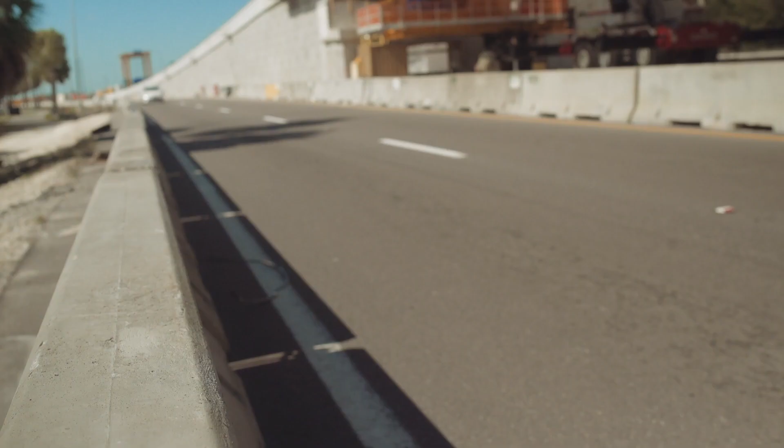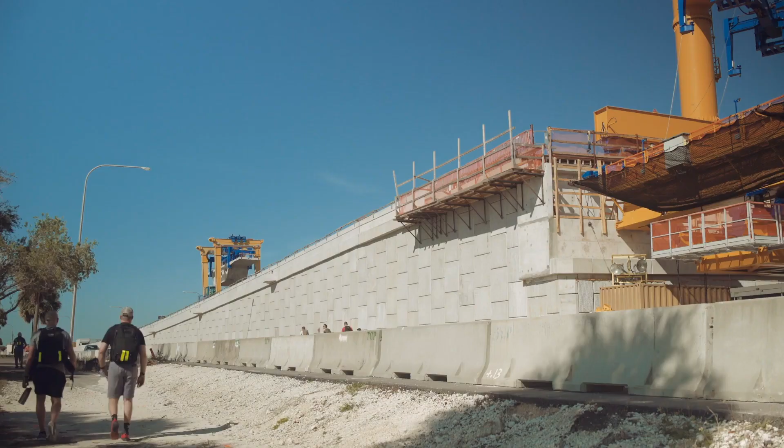It's an exciting day today. We've been working on this for a little over a year now. It's been in the planning for nearly 20 years. We've gone through the design reviews, shop drawing process, and quite a bit to get to this stage. I think it'll get people to where they need to be a lot faster and more efficiently, so it's really good for our area. What you see behind me is the first segment going on the piers for the Selmon Extension, and it's a really exciting day because today marks real progress for the project.

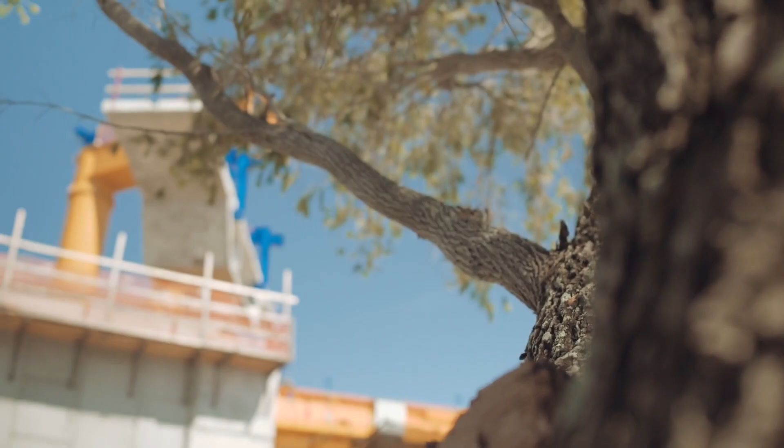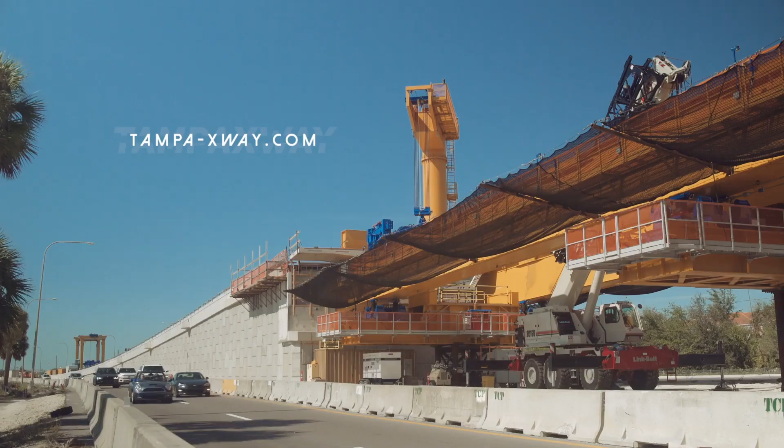First segment's gone in. We're glad to see that. That's going to show the locals the progress we're starting to make. It's going to make a big improvement when we get this project done because it's going to open up the traffic for folks and make the travel from east to west a lot easier.

So it doesn't look like the videos are feeding exactly as planned. Let's just move on through and we'll see if some of the others show a little better.

Again, my name is Russel Dingman. I was the project manager here on the job for basically the second half of it. The Selmon West Extension is located in South Tampa on the peninsula, connecting the southern tip of the existing Selmon Expressway over to the Gandy Bridge that takes Tampa over to St. Pete. The big thing is now it connects the Tampa Expressway all the way from Brandon, through Tampa, and into St. Pete over the bridge without having to go through a red light or any residential neighborhoods. So that was the big benefit of the job.

It's a $230 million design build with an original project duration of 1,000 days. The owner on this project was Tampa Hillsborough Expressway Authority. DOT did have involvement as well, since we had level 2 bridge work going on down the DOT right of way. The engineer of record was AECOM. The design build team was Kiewit Infrastructure South, paired with our internal group, Kiewit Engineering Group, who helped with conceptual work, looking at constructability and methods for how the project was going to be overall built and the sequence of the work.

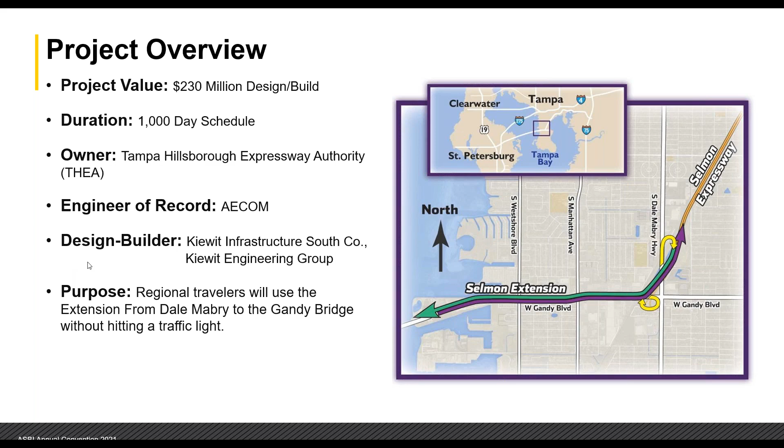So this project has a lot of history, not all of it good. The Florida Department of Transportation recognized that they had a lot of frustrated travelers on Gandy Boulevard after they came over from Pinellas County into Hillsborough County across the Gandy Bridge. They went through a very congested area with a lot of shops on both sides of the road with a lot of signals that slowed down traffic.

So they developed a PD&E study in 2002 that basically developed two alternatives. One was to widen Gandy Boulevard, the other was to bypass it. Of course, the bypass would have solved the problem of folks hitting traffic signals and the long delay along that route. But there was a lot of criticism. The businesses were really concerned that nobody would be able to stop easily in their shops. And so the project was canceled due to that public criticism.

Well, the Tampa-Hillsborough Expressway Authority was still very concerned about folks leaving our facility after going pretty smoothly from Brandon, wanting to get onto the Gandy Bridge. And so THEA developed its own PD&E study using a very unique design that utilized DOT right-of-way, first of its use in Florida, with an elevated structure along the median. That PD&E study was developed in 2010, and then we procured the funding, bonding for most of it, and moved forward with the RFP with a notice to proceed of the job in 2017.

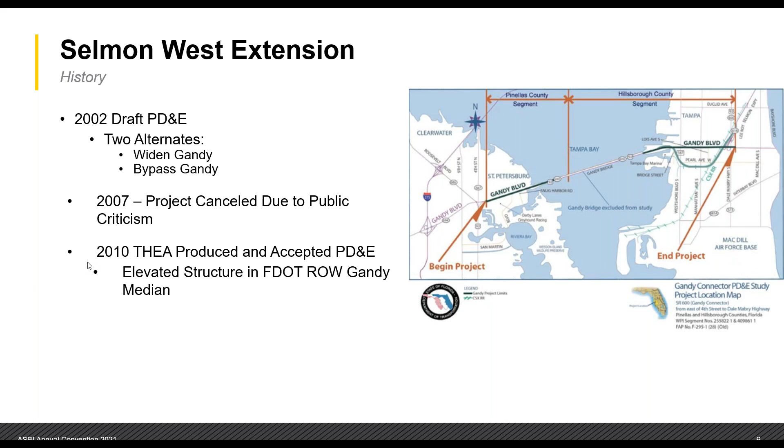So here's the bypass concept, and this was to the south of the Gandy Bridge, Gandy Boulevard, along a CSX route. It would have been elevated. It would have taken up quite a bit of private property along the railroad tracks, and the local folks are very resistant to this concept in that it would remove all of the traffic away from their businesses.

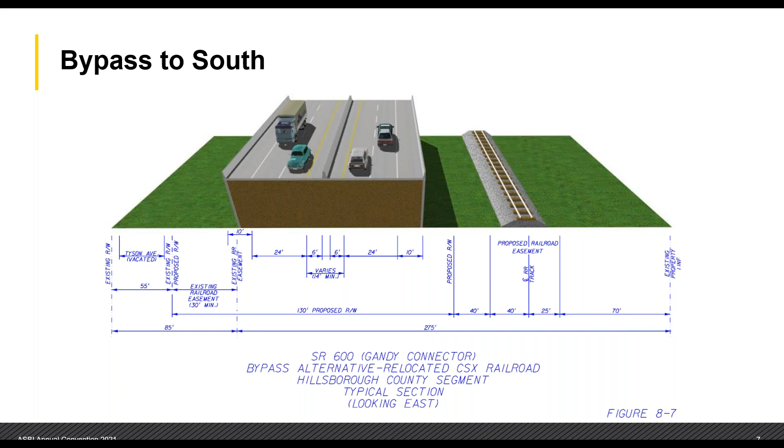The next option that they looked at was an elevated structure that was just north of the existing Gandy Boulevard. In this case, it would have removed all of the shops on the northern portion of the boulevard, and all of those shops, of course, were in major uproar over this idea.

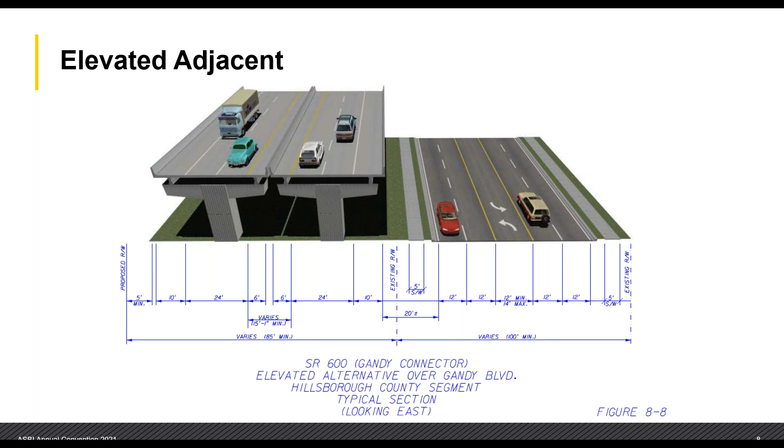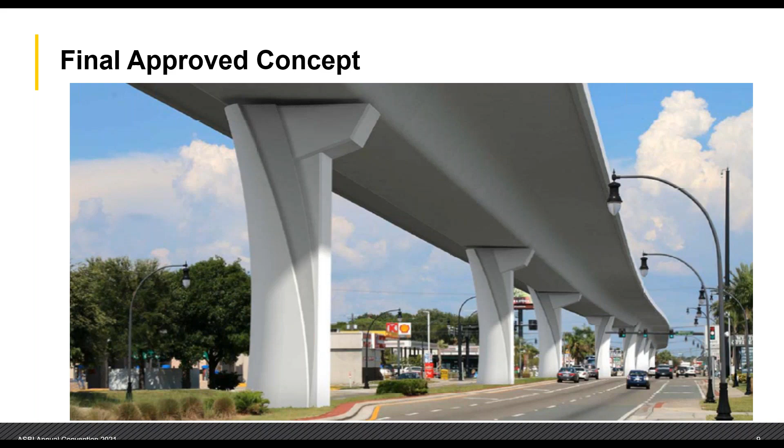So the final concept that was in the 2010 PD&E study that THEA developed has pretty high clearance, so you can see shops from one side to the other. Additionally, it ensured that none of the existing intersections had to be revised as part of the project.

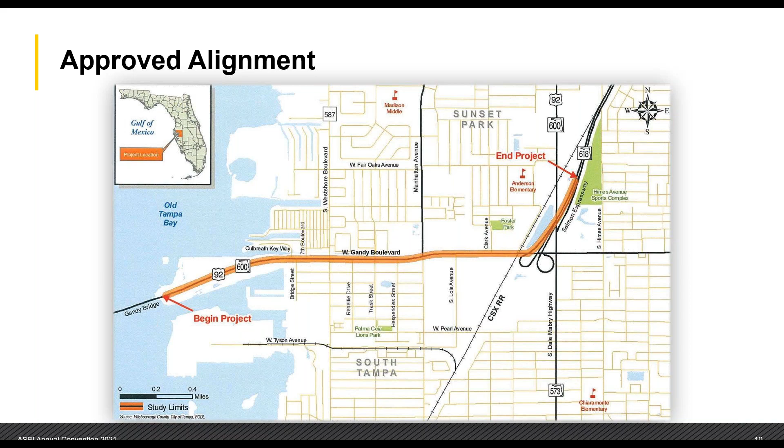So as Russell pointed out, the approved alignment went along the Gandy Boulevard right-of-way. Again, it's DOT right-of-way, and therefore DOT had involvement in that. They had to make sure that whatever was going to go over their right-of-way was a safe structure. So the project begins at the end of Gandy Boulevard and ends over near Dale Mabry.

So the main viaduct was 8,000 feet long. It required independent peer review. Because of the aesthetics that we wanted, we asked that all of the folks that participated in the RFP develop an aesthetic concept that made it look pretty similar throughout, no matter what type of structure they used. In this particular case, they used a single box structure. At least that was what was in the RFP.

With top-down construction, in other words, no lane or median closures during the day. All that work had to be done at night. Very limited space for the piers and foundations, and therefore the contractor had to do some offsets, and it did require redundant drill shafts. There were some requests that we'd allow non-redundant drill shafts with significant savings, and we refused that option.

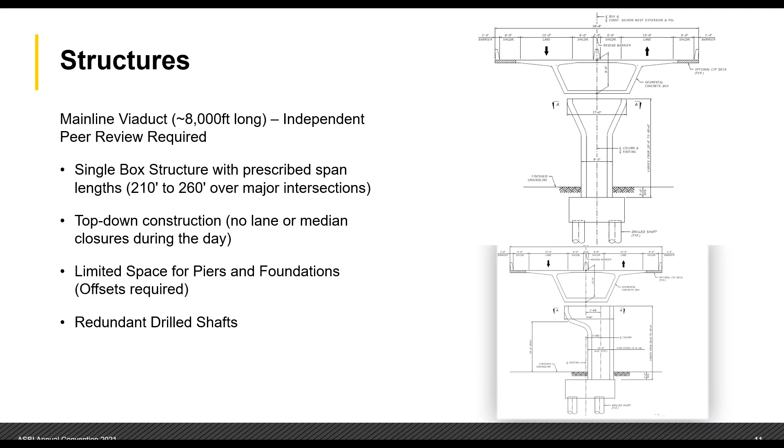We also required fairly low height landscaping, so again, the drivers can see through and over the landscaping. This project required state-of-the-art aesthetic lighting, which we can control from anywhere through a smartphone app. So we can change colors through that app. We have any of the colors in the International Color Scheme available to us. Again, I pointed out that this fits within the existing DOT right-of-way, so zero right-of-way had to be purchased for this project.

As part of the erection plan, we required minimal delays and no impacts to the traveling public. And importantly, a couple of the intersections required spans of 210 to 260 feet, which made it problematic as far as design, so you'll be hearing more about that from Bryan.

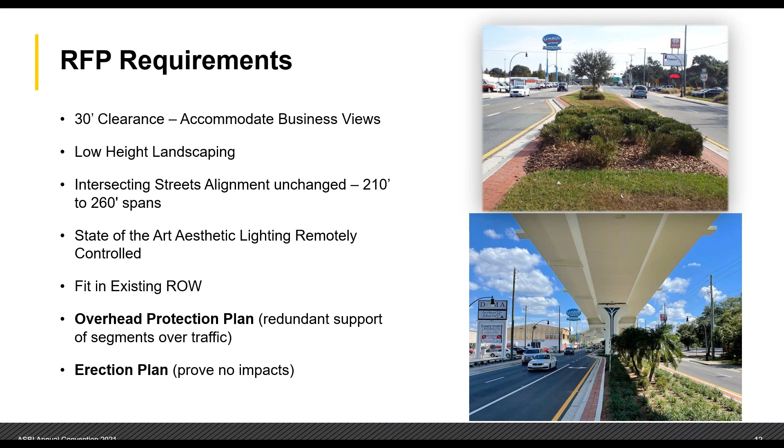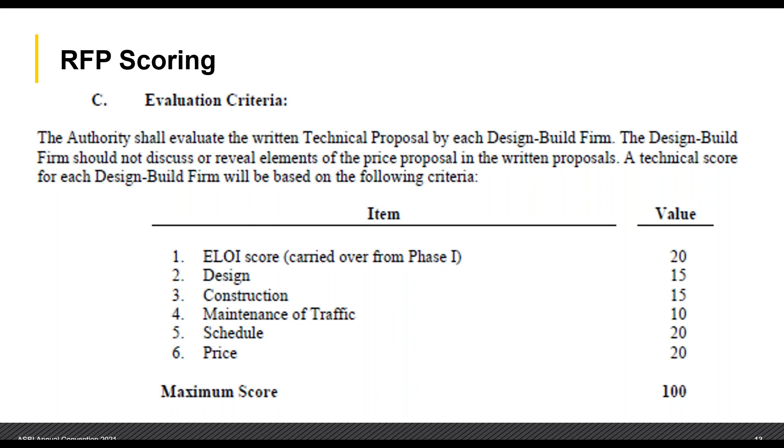So the aesthetic nature and the design of this project was so important to us that we only made price 20% of the score. Everything else - the design had a very high score, the construction methodology, the MOT, schedule was very important. 1,000 days for a $230 million project is really tight. They really have to focus on how they're going to get from A to Z in an efficient manner.

So I'll turn it back over to Bryan, or Russell, I guess.

I just briefly want to talk about some of the restrictions Bryan mentioned. The real idea here was we didn't want South Tampa to basically feel any impact of construction during the course of the project.

From a lane closure standpoint, we had very strict restrictions, where lane closures couldn't be set up till 9 p.m. at night, and had to be opened back up by 7 in the morning. That way we took all construction out of peak traffic times.

Now, as for impacting traffic below, we did not do that over the course of the project. We maintained 2 lanes in each direction throughout the whole job so they could maintain their normal traffic program. The only time we closed any lanes was during those nighttime closures.

We did have some full closures over nighttime periods for the far east end, where we had to set the big steel tub box girders. But we had a very limited number of those that we were allowed to utilize through the course of the project.

Another big restriction was with our substructure. Since we had the offsets, as Bryan mentioned, we had to maintain the location of the existing median and all the existing turn lanes. So we had some offsets, and about 80% of our substructure had post-tensioning, to allow us to pick the location of where the piers went before the final location of the segments and the actual structure was determined.

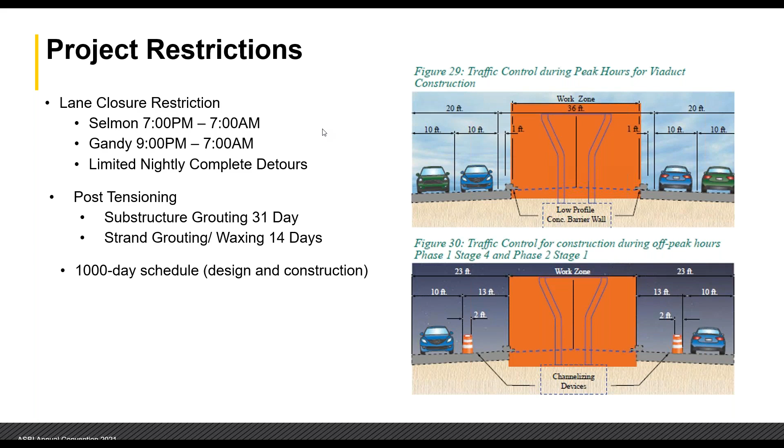Now I'll turn it over to Bryan Lechner, and he'll go through some of the other constructability items and thoughts that we provided going into the design.

Thanks, Russell. Pretty early on, even before the LOI and the RFP came out, we knew there were some pretty key challenges on this job that were unique. The first one here was our 1,000-day schedule - that's design and construction, and really it's a 1,000-night schedule.

If you look at the requirements of the RFP, there's not much you can do during the day with a conventional overhead gantry type balanced cantilever erection. Really, to get it done in time, we would have to have 2 headings using an overhead gantry and a more conventional balanced cantilever erection scheme.

Also, the span lengths are a bit awkward - too long for span by span, and a little too short for efficient or economical balanced cantilever. But those span lengths were set based on sight distance for the left turn movements across the intersections. So all our major crossings had spans between 210 and 260 feet, and our end spans were on the order of 170 to 190 feet.

We also had these large eccentric foundations because of those left turn movements, and getting those foundations to fit in the median and support the loading required for these long spans was pretty challenging.

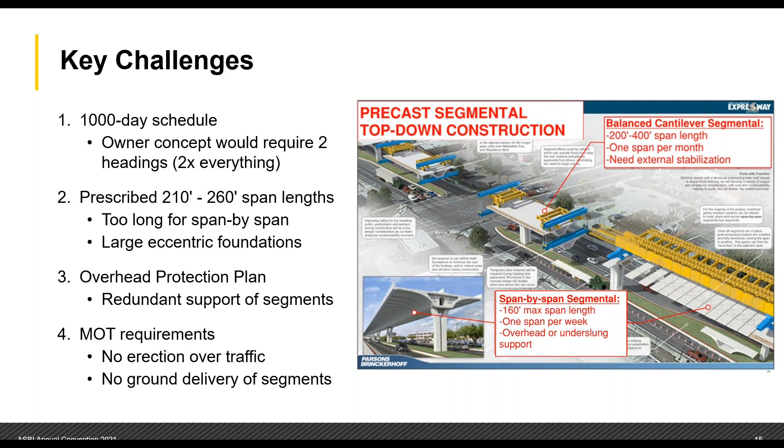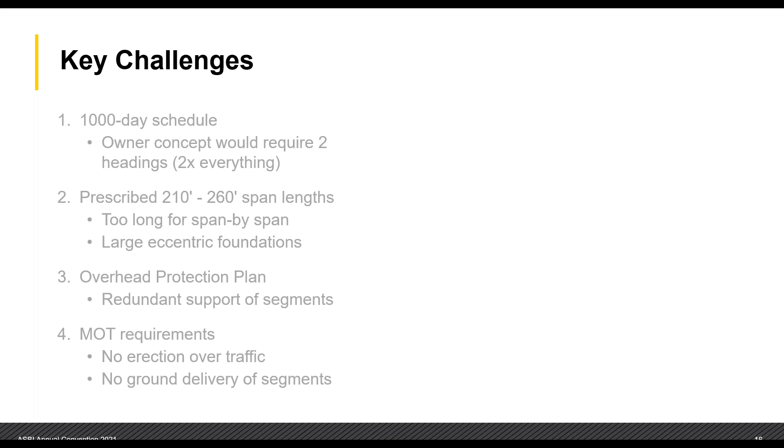And lastly, as Russell mentioned, the MOT requirements were pretty onerous, and what it came down to is you really couldn't work during the day if you used a conventional system. So pretty early on, pre-LOI, pre-shortlist, we determined a key: we wouldn't even pursue the job unless we could figure out a way to build this in span by span. We just didn't think it'd be economical to have two overhead gantries and two headings going at the same time.

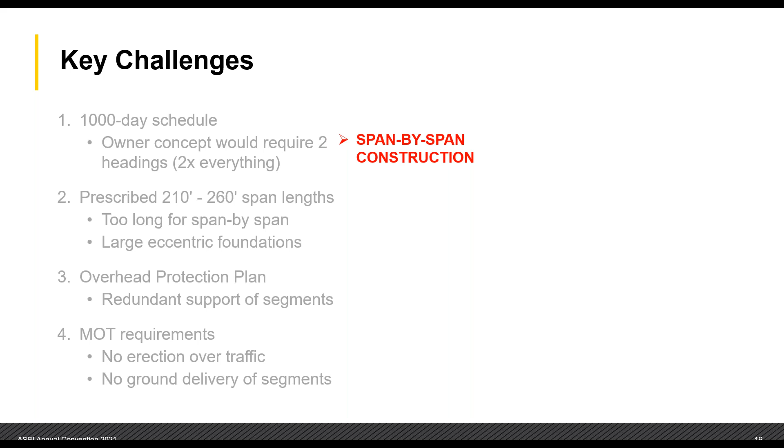We also decided pretty early on that an extradosed design to reduce the mass, making these longer spans possible, was going to be our best approach.

For the overhead protection plan and erection plan parts of the RFP, we also decided an underslung girder made more sense here, because each segment, after being set on the girders, is supported positively by the erection girders, which are redundantly supported by temporary towers—there's more than two towers, there's three or four towers under each pair of erection girders.

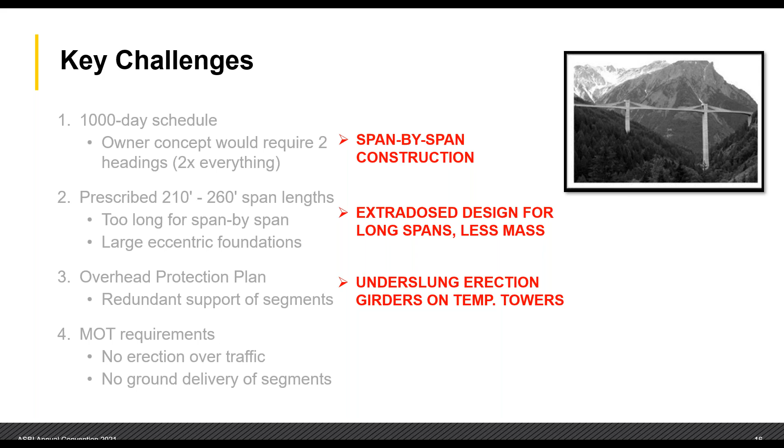This way we achieve redundant support of the segments before we stress all the post-tensioning. That 30-foot height really helped, because you don't have to worry about the cross beams of the erection girders getting in the way for overhead clearance on Gandy Boulevard. And lastly, it's pretty obvious, but top-down construction with delivery of segments from the completed structure made a whole lot of sense here as well.

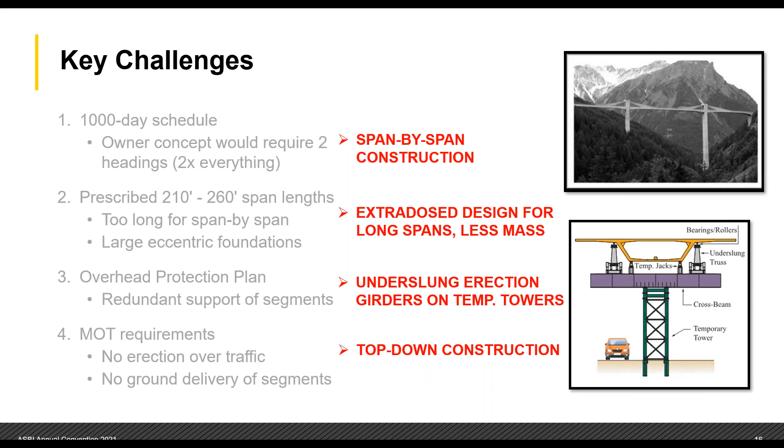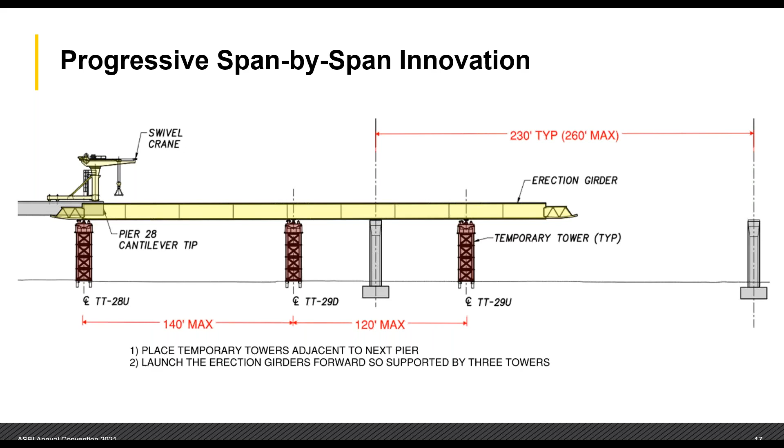So what we came up with is this progressive span-by-span innovation—it's essentially span by span in two pieces. We're doing a longer span in two different pieces, and our temporary towers are split on the piers, spaced at about 120 feet, varying a bit based on each pier location. This way the erection girders didn't know that the span being erected was 260 feet—each section being erected was more typical, 140 to 120 feet, which is pretty optimal for span by span.

Next we erect the pier section, which is 14 segments over the pier, and stress post-tensioning in that section. Those temporary towers actually have a dual role, supporting the erection girders and supporting the pier section temporarily.

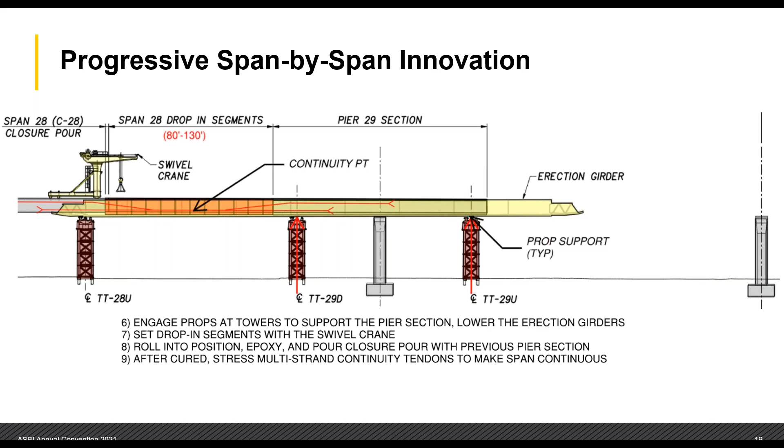Then, without needing to advance the erection girder, we can go back and erect a drop-in section, which is match-cast to the pier section. Then we pour a two-foot closure with the existing bridge that's just been completed and stress our PT in the span to make it fully continuous.

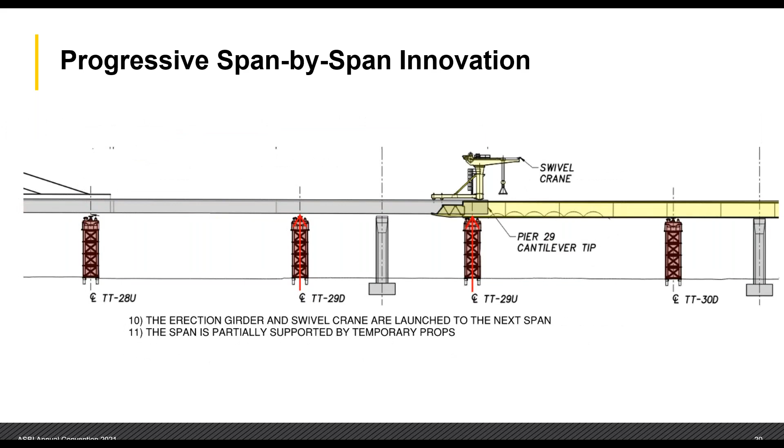At this point the swivel crane and erection girders can advance onward, and behind the erection, taking it off the critical path, we can then form up our fin for the concrete and stress the PT.

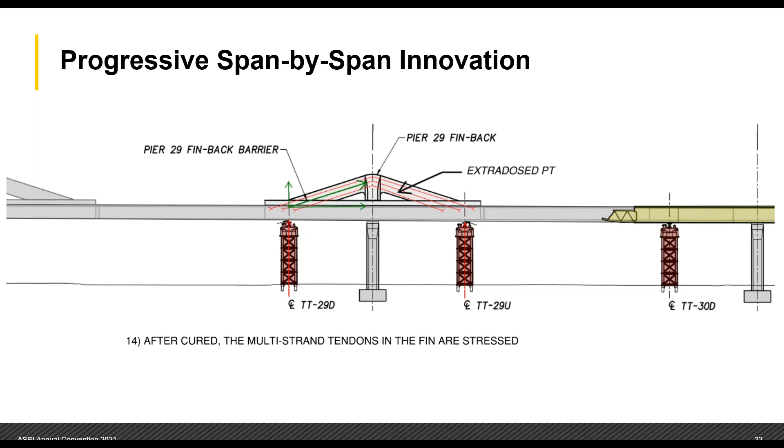The PT and the fin is essentially just taking the reaction out of those temporary towers, so they're actually sized initially to take half of the weight of the span out of web shear and into that fin truss. Then lastly, you can take those towers down and advance them up—we had 10 sets of towers, always kept up ahead of us there. That fin truss replaces the reaction from those temp towers.

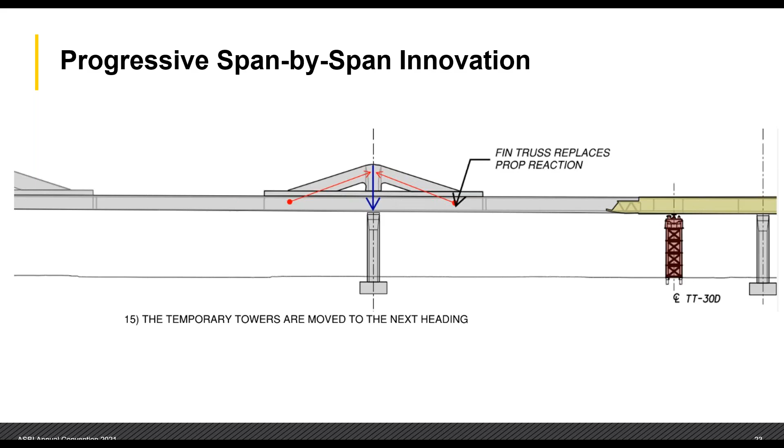Tim's going to take it back here, and there's an animation of the erection of a typical span.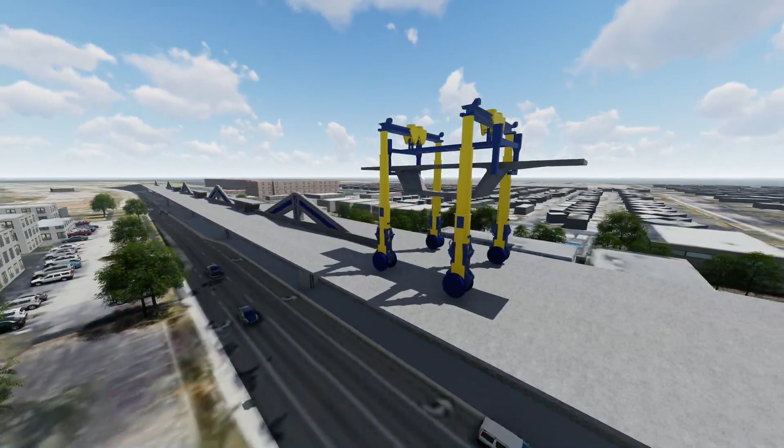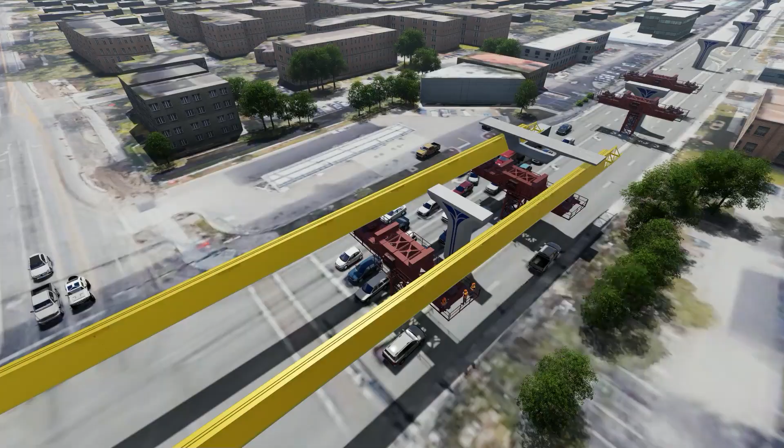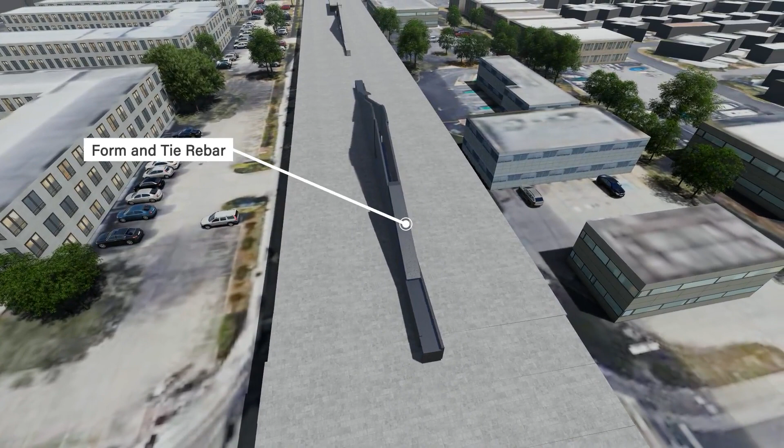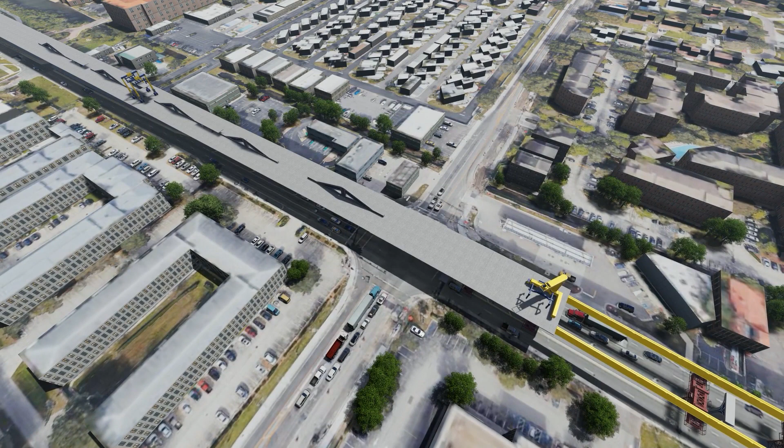Sorry about that, guys—yeah, it's the computer. Yeah, there you go. I'll take the presentation back here in a second. Hey Tim, can you give me the presentation back, please? Were y'all able to see the whole video? It cut out, maybe I have a bad connection. Yeah, I was actually able to see it, Russell. Okay, just checking, it's probably my connection. I think we lost Tim.

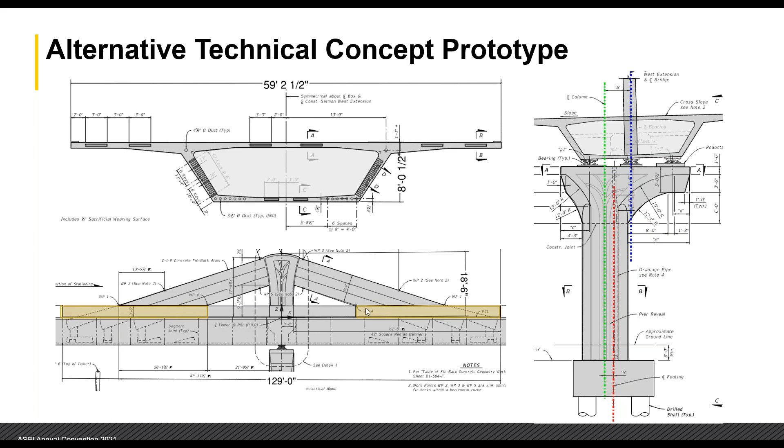So our fin kind of behaves like a concrete tensile element. Our towers are in compression, obviously, and our bridge girder itself is the compression chord of that truss. From about the center of the fin to the left, it looks a lot like a typical span-by-span girder, with external tendons coming down, deviating through a deviator, and some bottom slab tendons as well. Everything to the right behaves more like this king post truss, where the entire triangle rotates like a rigid body instead of getting the more typical curvature and flexure you'd see over the pier for a typical continuous span-by-span bridge.

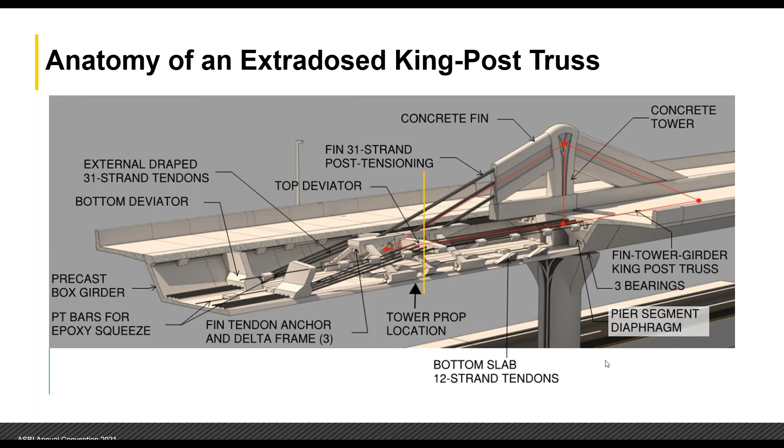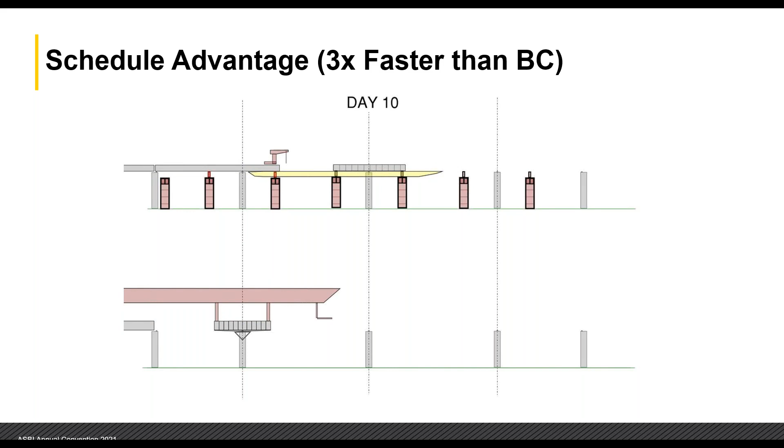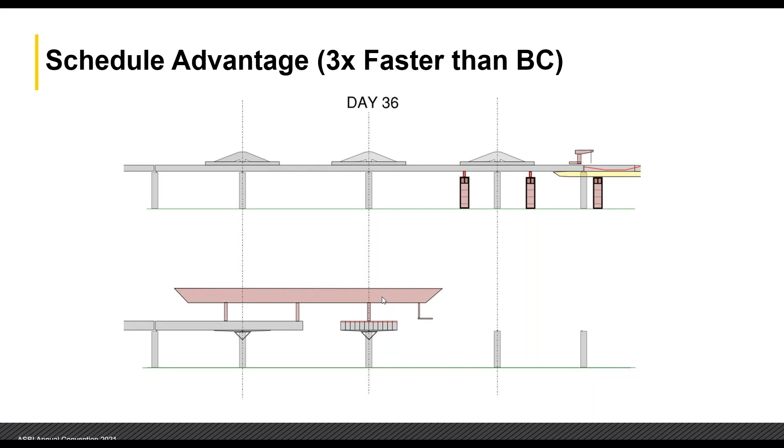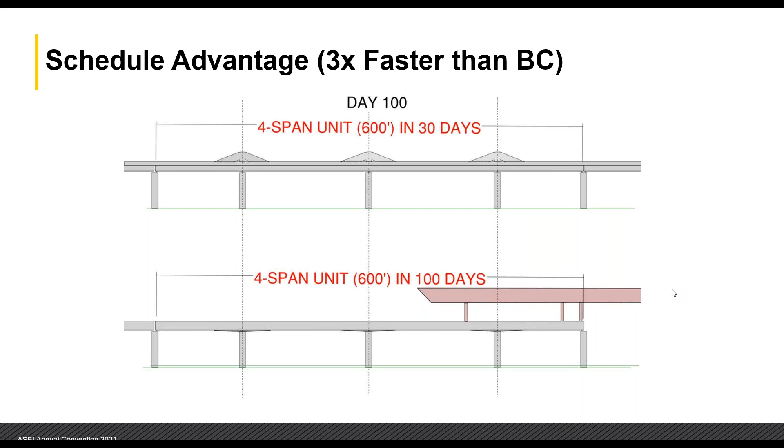The big advantage of this system, I think, is pretty obvious in this animation. We were able to achieve a 7-day cycle at the end of the job per span. Our average cycle per span was 9 days, and really that's nights, because there's not much you can do during the day except deliver segments on the bridge - all the segment erection was done at night. Compared to a typical overhead gantry balanced cantilever approach - this below here is based on our Bayonne job - you can see in 30 days you can erect a 4-span unit versus 100 days for a conventional overhead gantry and balanced cantilever. So it's much faster than the conventional option. The obvious caveat is you need temporary towers away from your piers, which is not always possible.

I think there's also some pretty big advantages here in the equipment. It's much easier to use underslung girders. I'll call them dumb steel - there's not much automation to them. They're always locked, always have more than one support. In our system, there's either 3 or 4 towers under each girder, and it's pretty inherently stable because all the loose segments are on top. 3 points of support, nothing's hanging on cables.

An important thing to remember is that during segment erection, it's pretty much a determinate support for the erection girders. Those 2 temporary towers under the segments are taking most of the load, so you know where the load's going. I think the major problem we have with overhead gantries over the years is that you don't always know where the load is, because you usually have 3 supports and you're moving segments, unloading and loading supports, and that one locked support can sometimes get unloaded and you have issues.

And it's also, like I said, on a 1-to-1 basis - one overhead gantry system versus an underslung truss type system - it's probably half the cost. And on this job, it would have been a quarter of the cost because we would have needed 2 headings. Like I said before, I think there's less risk of instability with this system.

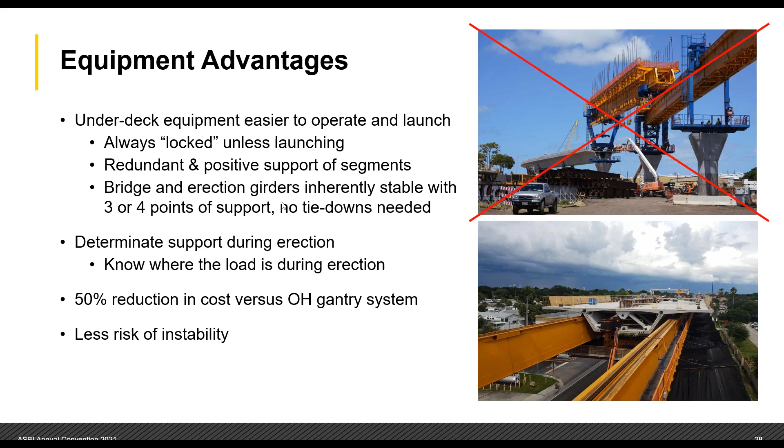There's no God pin on Bayonne. All the guys on site - there's just one pin called the God pin that literally locked the entire gantry from moving longitudinally. There was a guy whose job was to just watch the God pin and make sure it was installed correctly. There's no God pin type issues with an underslung system.

Materially, there's also some pretty big advantages here. I'd say on average there's like a 13% savings in the concrete and in the weight of the bridge, so bearings and substructure, and 16% savings on the PT. That was for an FDOT job with wax tendons. I think the savings is probably going to be more for a grouted job where you have bonded tendons.

Our rebar and transverse PT are similar. The rebar was similar because there's a lot of rebar in the fins themselves that you would not normally have for a balanced cantilever bridge.

On the substructure side, there's actually a pretty big savings, mainly because the permanent foundations are not supporting the overhead gantry. You don't have all that load at the offset being supported by our permanent foundations. There's no segment drop case, no overturning. So I think a lot of our savings came from the fact that all of our temporary systems were supported by temporary towers in the median.

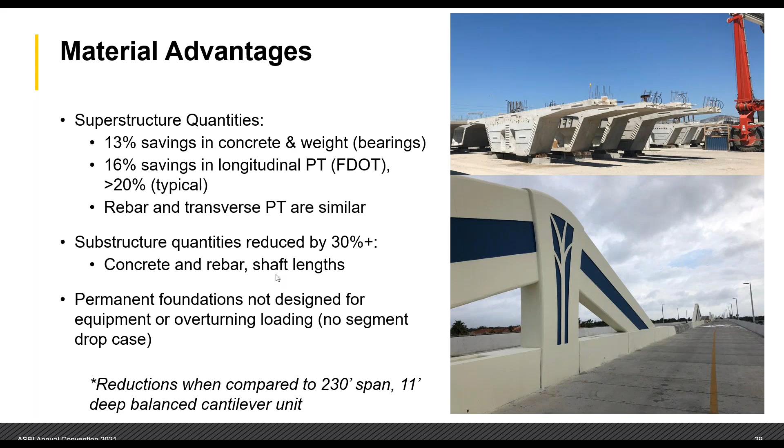And all these reductions are compared to like a typical balanced cantilever 230-foot span type approach.

Then I want to get into some key design decisions. I know at the ASBI conference, someone asked why not just use cable stays like a typical extradosed bridge? Why the concrete truss? Our main reason for that is just the stiffness that we need to actually suck enough of the superimposed loading out of the girder.

You can see on the right there, our goal for just dead load plus PT was half of the web shear is taken out and it's going up into that truss. Then during service and ultimate, that goes down a bit, just based on the relative stiffness between the fin and the webs of the girder. And then at ultimate, that fin cracks, so that's why there's a reduction even more at ultimate.

We did a lot of work on this front to just see where the load is actually going. Also a big benefit is that all the PT in the median - I mean it's literally a 2'6" wide median - and any vehicular impact to those cables would be a bad day. So we actually designed the barriers to take that vehicular impact. It's a huge benefit, and also a big reason why we went with a concrete truss.

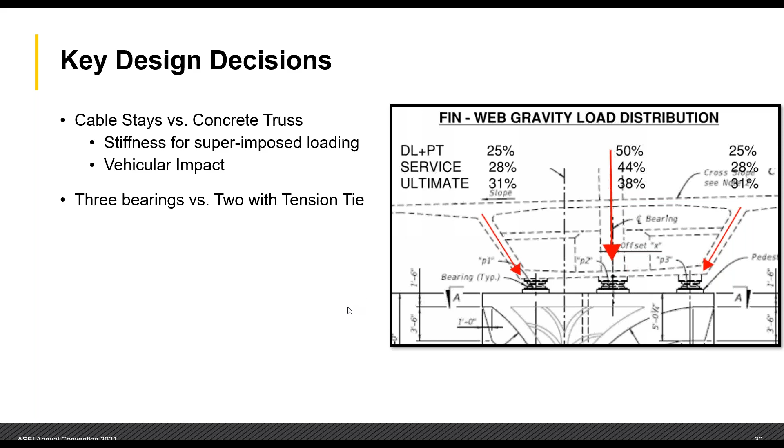And lastly, just some comments on the flexible filler and its impacts on our external and bottom slab tendons. Obviously, if you have a waxed type system, it's an unbonded PT situation, and ultimately that controls the PT design in the positive moment region. It did not in the negative moment region. For a typical balanced cantilever bridge, your top slab tendons are all going to be grouted anyway. Even in FDOT, all the wax tendons are your draped and bottom slab tendons, but it does reduce the amount of stress increase at ultimate that you can count on, and it ends up controlling your PT design and quantities at midspan. We also didn't really have a good feel initially for what stress increases we would actually get because of this rigid body rotation of the pier truss or the fin truss.

So we actually did a push down analysis, similar to a push over analysis for seismic. We did a push down analysis, basically a large displacement model, with the tendons modeled as explicit elements along with the deviators, and we allowed all the hinges to form where they would want to form. We see hinges forming at midspan in our end spans and in our middle span for loading in the middle span, and actually negative moment hinges forming at the ends of the fins. We were able to explicitly measure what the stress increases were in these tendons and use that for design.

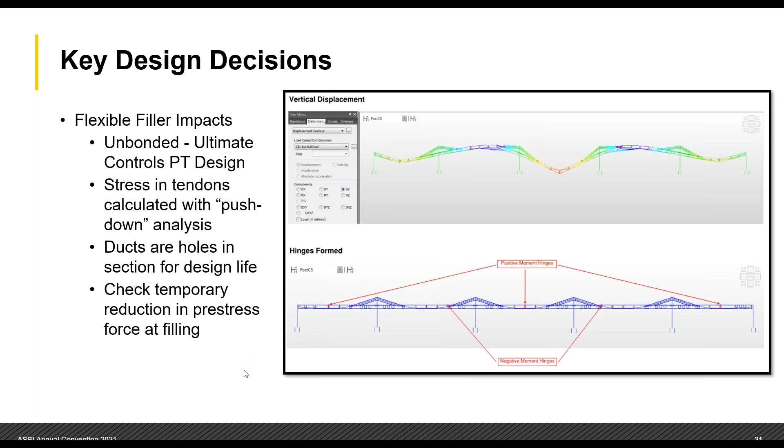I believe that's all I have for now. I think Russell's next.

Okay, I just wanted to go through some pictures explaining some of the stuff on the job, some of the things we did. This being one of the first of its kind for FDOT, going with the wax system and also with the fin back system.

We did several mock-ups out at our casting yard, both to demonstrate the waxing process and also to show the integration with our fins. Here you can see a full-size fin mock-up that we did, fully constructed with rebar and everything, just to make sure we understand any issues or kinks we might encounter in the field before actually building on the permanent structure. Also on the right, that's a waxing mock-up simulating the waxing process through those fins, to make sure we're getting the entire duct fully encapsulated with wax so the tendon is fully protected. Next slide.

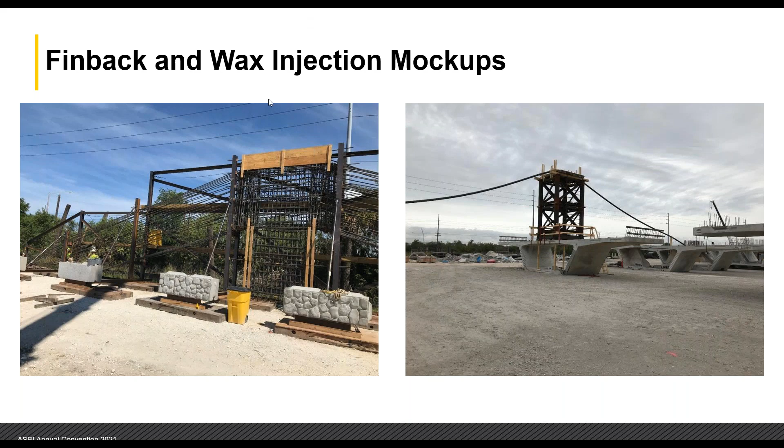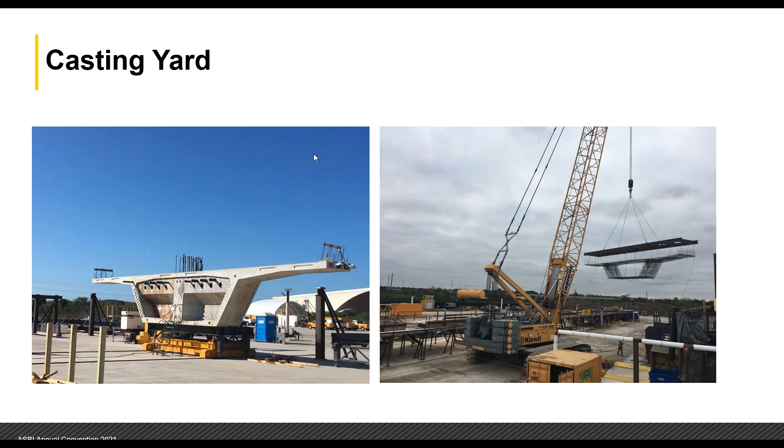So this one and the next slide are just some pictures from our casting yard. We had 744 segments on the job. We set up with a 5-bed system: one that could do the expansion joints and pier segments, 2 that were doing typical segments, and then 2 final ones that did all the anchor segments - the segments that tie into the fin from a timing standpoint.

The anchor beds could also be converted to be used to do typical segments as well, and that's really where we optimized, going from system to system.

We also had the rebar jigs set up back behind there, and I think we had 7 jigs set up so we could pre-tie our cages and set out.

We had about a 10-acre site that we set up on, with the storage capacity of taking right up around 250 segments out on site. Towards the end of the casting operations, we were getting pretty full, but we never did actually fill the site, though we were right there at it. So this 10 acres turned out to be the right size for our 744 segments that we had to cast for the job.

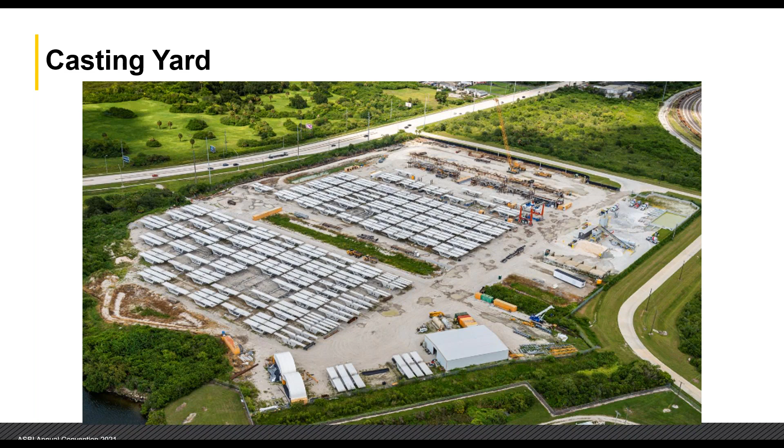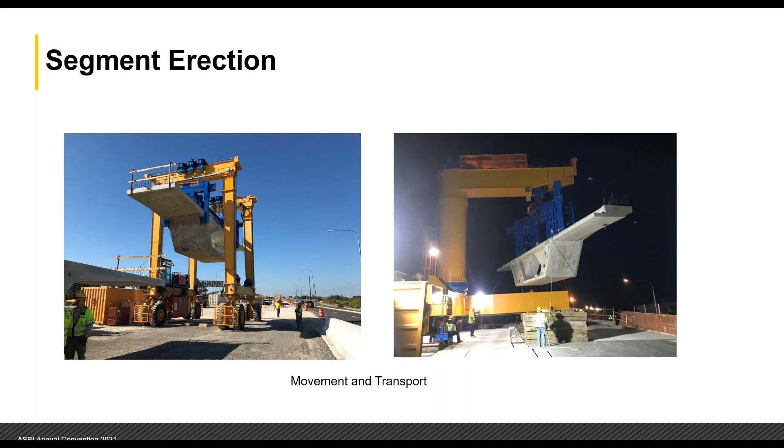This is kind of just an overview - you can see how at night it was all lit up and how the segments looked. As Bryan said, we'd initially set the segments out, rolling them out from out to in. We'd build out that initial pier segment, do the initial stressing on the pier segment to tie it together, and then we would do our drop-in segment and closure pour there at the end of that, prior to launching forward to the next section.

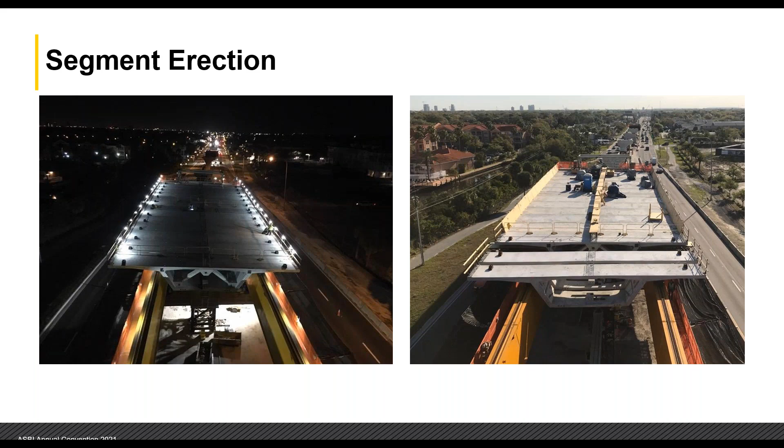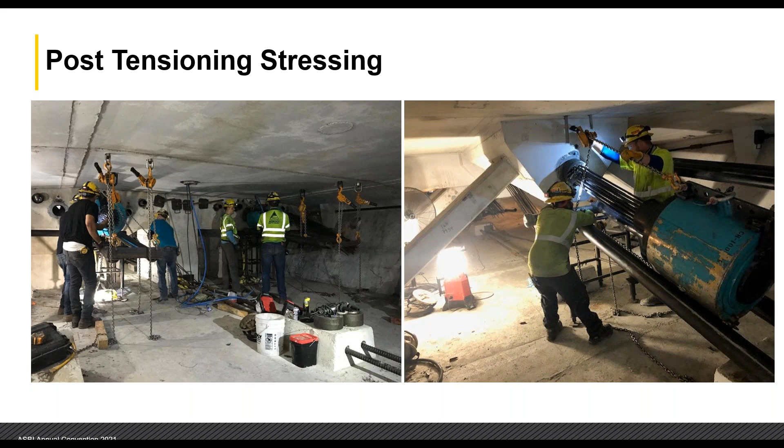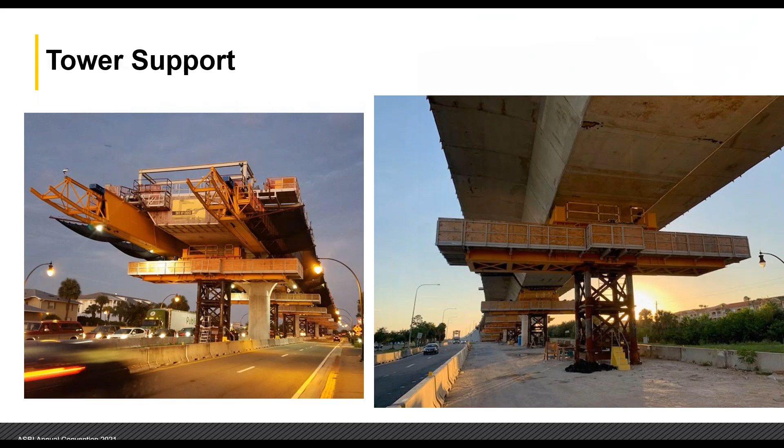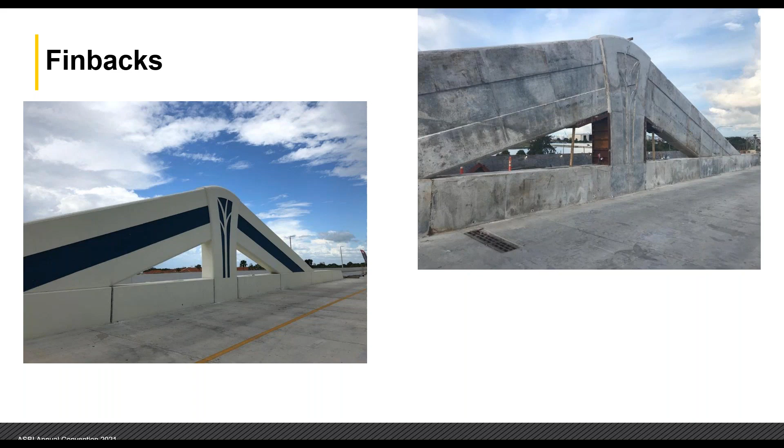This is another final actual picture there on the left of the fin, so you can see the final design, the aesthetic design that we came up with, and on the right there's an in-progress picture to compare the initial stage to what the final product looked like.

Bryan talked about the different lighting systems. All the fin backs up top also had internal lighting inside the fins and also on the outside shooting up the fins, with the ability to change colors and modify for different events in the locale, whether it might be for the local sporting teams or at holidays. Gives them a great time.

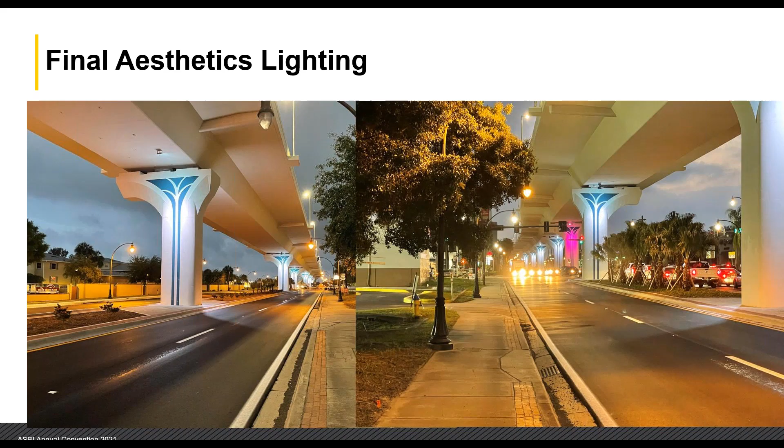Go ahead, Bryan. Okay, so now we have our third video. This was the night that we set the last segment.

Having some struggles with this video.

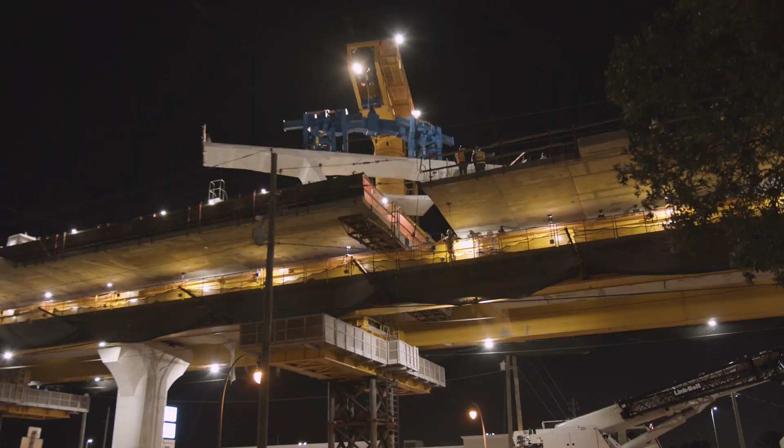There we go. So we're here on a great night for the Tampa-Hillsborough Expressway Authority. We just watched them set the last segment of about 744 bridge segments on a 1.5 mile structure. That's part of the Selmon West Extension project. We're very excited about it.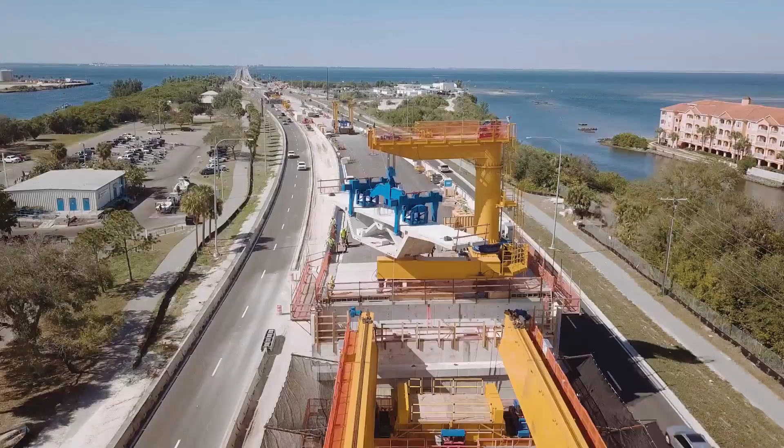It seems like just yesterday, almost 1.5 years ago, we were at the other end of the bridge and we set the first segment. We were excited about that and how that was going to affect the community. Well, here we are now, just before Christmas 2020. We set the last segment in place tonight. Moving forward, come springtime, we're going to have this bridge open to the public.

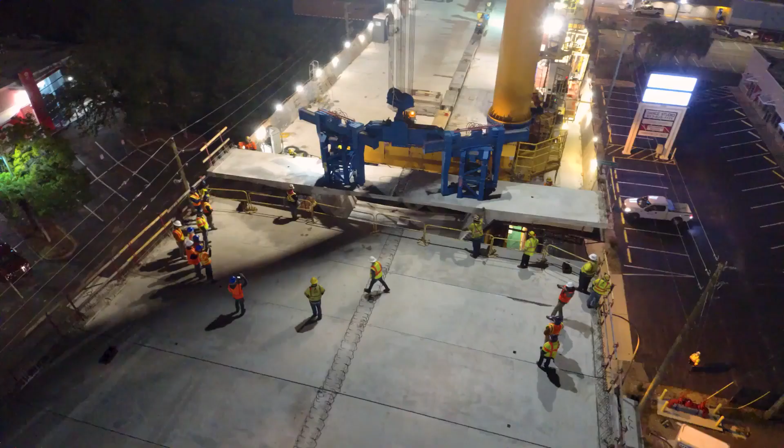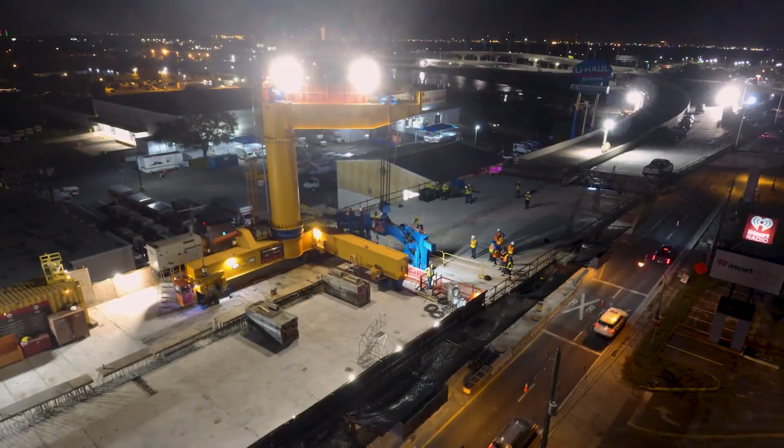Tonight is for everybody who dreamed of this project. Thank you very much. We're very, very excited about what you've been able to do for our city and our town. We can't wait to be on this road. Here's to everybody.

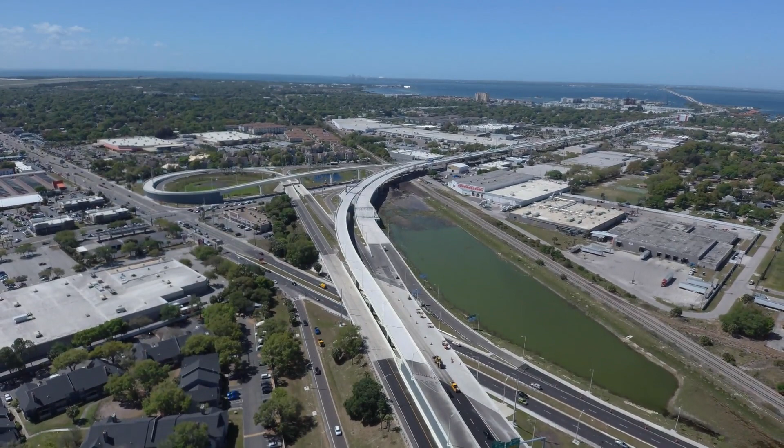And that concludes our presentation. So if there's any questions at the moment, we can try to answer those. We still have a minute or two here.

Yeah, we got a few, definitely got a few questions. Thank you guys, that's a bunch of innovative solutions to some problems on that project. Really fascinating. So let me go ahead, and the first question somebody had was about the completion date.

When this project was completed, did you run into any issues with COVID impacting your schedule or impacting any part of the project?

This job did take place during COVID, so it did kind of change some of the procedures and how we work day to day throughout the job, and did push the schedule a little bit because of COVID and dealing with that, since COVID was going on during this time. But overall, the job was very safe. We had a lot of good COVID procedures in place, and we never had really any serious outbreaks, or really outbreaks in general, period, on the job that caused any major long-term full shutdowns on the job. But COVID definitely had an impact on us.